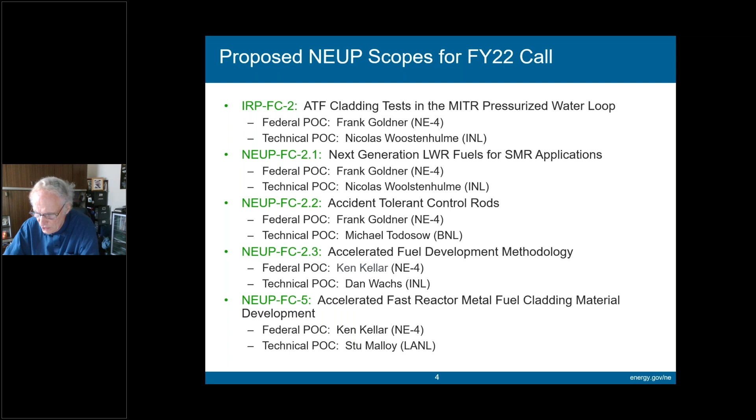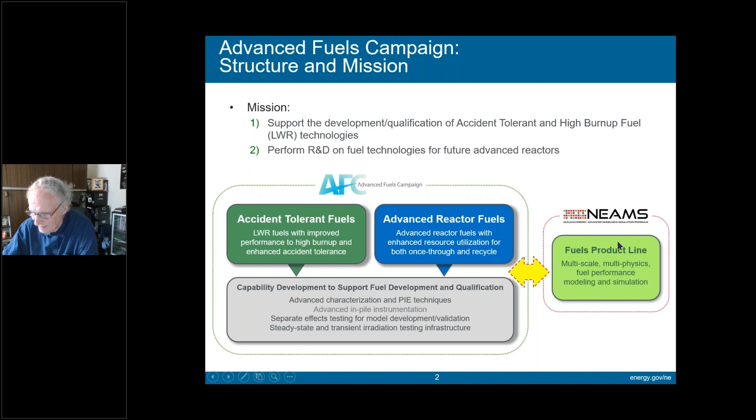Okay, this is what we'll be covering today in order. And we'll have the contacts at the very end of the presentation. I'll have a contact sheet, which will give you the email addresses of everybody that you're hearing today. Whoops, wrong direction. Okay, this is the first one I want to address: ATF cladding tests in the MITR pressurized water loop. This is an IRP, which means,

Excuse me. I was doing so well.

Okay, here we go. So the first IRP, since this is a rather large one, could be large and could be for a significant amount of time. This is one of the only places where we indicate an area that we wish to use. Thanks to the cooperation of MIT, they have a research reactor with a pressurized water loop. And since the ATR is down for a while, and we don't have other advanced facilities with loops available to us, this looked like a very interesting area.

One reason it's important to ATF is that up to now, we get the combined effect of coolant and concept when we put the lead pins in commercial reactors. I think we're in about 8 reactors, which is the good news, but of course we can't play around with adjusting the reactor coolant, and there are some benefits that people have told me about in the past, and that's one reason behind this.

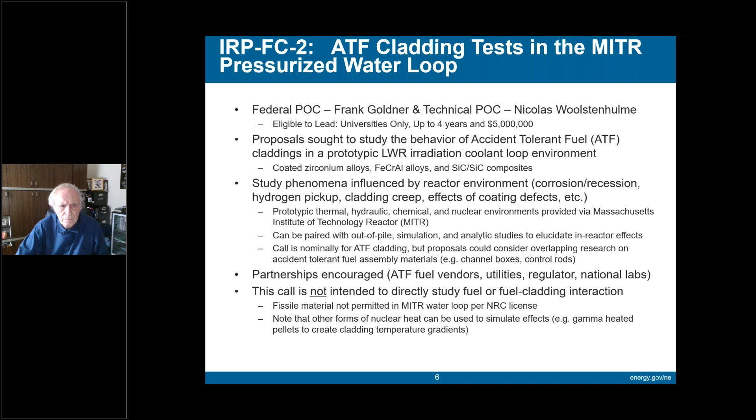And so this is, at least in an isolated loop, a flowing loop like this. So this call is not about fuel. This is not about fuel or the fuel cladding interaction. This is about cladding behavior and cladding coolant behaviors. But I should note that other forms of nuclear heat could be used to simulate certain effects, such as a gamma heating surrogate. Shown here on this screen are just some specs about MIT's water loop.

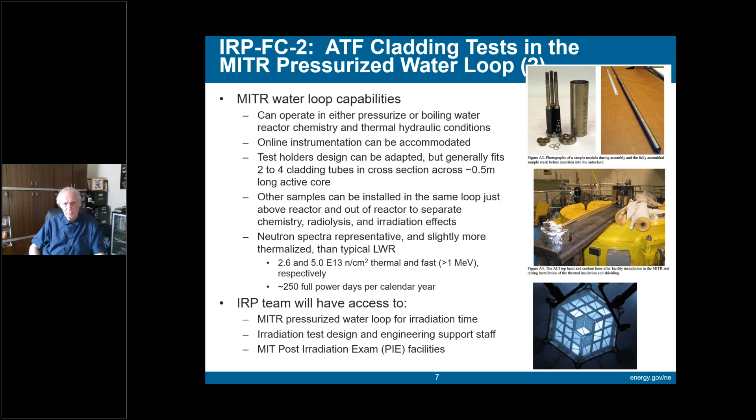I won't go through this in detail, except to say that they have a really nice spectra that's fairly representative of an LWR. The flux is pretty good, and they operate a fair number of days each year. Because it's representative, but not necessarily accelerated, I think what that means is in order for the data objectives to be accomplished within the time frame of this IRP, we really are looking for proposals that create impactful data in the lower fluence or the lower exposure regimes, right? It would just take many years to get to a very high DPA in MIT, and that's probably not going to fit into the proposal time frame.

Other than that, you can put a few specimens in. There's other details there. You can see those as you wish. Frank already talked about this, a really notional example schedule of what we envision such a proposal would look like with designing and fabrication, something on the order of a year to a year and a half of irradiation, followed by some post-irradiation exams, final reporting. So because that's pretty compressed for an entire irradiation campaign, I would say we're focused on data outcomes that can be accomplished with online instrumentation and at lower fluences, and perhaps with limited PIE.

And the last thing I'll mention, Frank already said this, but I'll just reiterate, is that strategically, we've talked with a couple of people at MIT who are experts on using and designing tests for this loop, and they have committed to abstain from writing their own proposals so that they can be available to help consult on your idea for this one. So even though I think I'm listed as the technical point of contact, there's really some co-technical points of contact at MIT. So I would encourage you to reach out to me, and we'll coordinate a discussion to talk about your potential proposal. So that's it.

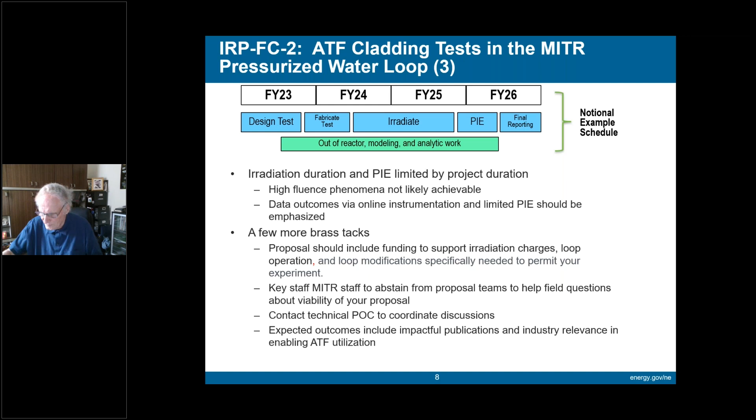I'm excited about this particular project for a lot of reasons. I think it offers some terrific technical opportunities that help the campaign, but I'm also very interested in expanding the exposure of students and faculty to opportunities to conduct irradiation testing in high-end irradiation testing facilities. And so we think that's a critical skill set that needs to expand in the greater community. So I'm looking forward to seeing the teams that put together for this and what kind of great ideas come out of it.

Thank you very much, Dan. As I said, we have a lot of hope for this. There is a problem with the short time, so that has to be considered, obviously. But hopefully, I think instrumentation has made major advances in the last 20, 30 years. So that's also a good opportunity. And of course, this may complement some tests that are being done by some of the vendors under our program, which is why I would also encourage contact with some of the vendors who have claddings that are near term as well as longer term.

Okay, now I'll switch to the next one. Thank you very much. Okay, this one still keeps Nick involved. He's really one of our go-to geniuses, and so I'm very pleased to keep him involved. The idea here is this is kind of more like let's think about the future as well as the present.

There are some LWR concepts being considered for the future. As you know, right now one only knows obviously about 2 or 3, but we were thinking that maybe some of the things we're developing now may have validity to other concepts that are new. The 2 obvious ones are shown here, but they also someday will be quizzed when they go through licensing, or as part of their licensing, on beyond design basis accidents, which of course the small reactors may have much less of a situation to be concerned of and may not even be a licensing issue.

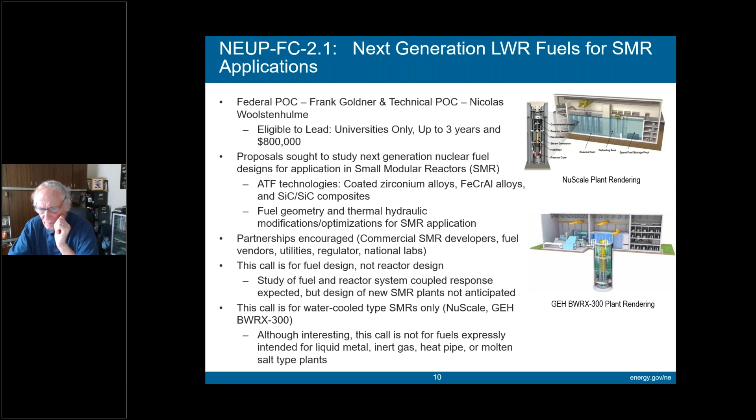And so, you know, we brainstormed upon ATF technologies. Frank pointed out coated zirconium alloy, or perhaps other FeCrAls, silicon carbide composites, maybe even fuel geometry modifications and thermal hydraulic optimizations for SMR applications. So this is a little open-ended. The challenge is think of an innovation to research in the fuel design that somehow increases the value potential of this next generation of SMRs. Let's see, what did we write here?

So one might even think about what I'll call a phase 1, phase 2 strategy, right? I think we all know that once SMRs are starting to get on the grid, which hopefully is going to be in the next few years here, I believe it will. Perhaps there's a fuel design that's optimized for a retrofit application to support a power uprate, for example. Or perhaps there's a fuel design that supports a second generation design iteration and an even more advanced SMR. So use your imagination and come up with something that's credible. And I'm really excited about this one. I think this one will be fun.

It should go without saying, but I'll say it anyway, that obviously a partnership with an SMR designer or a fuel designer would be encouraged on this type of proposal. These are the normal smaller price tag NEUPs, not an IRP like the last one we were talking about. So we're not necessarily imagining an in-reactor irradiation. Although who knows, maybe a few years from now we'll have an IRP for that as well. But for now, we're really imagining things that would be lab work and analytic studies, modeling, design studies, that kind of research. So out-of-pile testing to support those types of things.

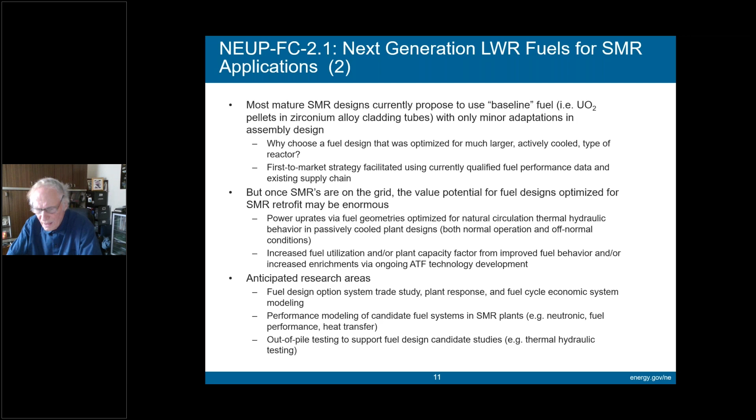I think many of the reactor vendors, you'll notice, describe the lack of innovation in fuel as a feature. I think in the future we need to fill that gap, and so this is kind of the beginning point for that effort. And obviously, the experiences we've developed as a collective university, laboratories, industry, and NRC through the development of ATF are great leverage points to help move this forward. And so we're anxious to see what kind of teams can form and what kind of ideas will come out of it. Back to you, Frank.

Okay, thank you. I'm going to move on to the third. I may have time for questions after this one. As I showed you earlier, last year we only could do 2 because of the money concerns. We decided to focus just on an advanced area for ATF, namely when you get into the very high burn-up and high enrichment regime. But this year, even though we don't have much more money necessarily, oh well, we'll see.

This is an area that we had to drop a couple of years ago on accident-tolerant control rods and other materials that are not included in ATF up to now, but are important. Accident-tolerant control rods are important, in my opinion, from accident tolerance concerns, but they haven't been in the formal program. So this is kind of a foot in the door. Of course, it's going to be important because things have been done. Obviously, the vendors have concerns about this. We've had some small business awards in this area.

So this is one where if you're interested, you'll want to talk quite a bit with Mike Todosow of Brookhaven National Lab, because this is kind of what he had. I'm going to let him explain his thoughts. But I'll say, if you do this, we're strongly encouraging that you find out what has been thought of and done, because, you can imagine, silicon carbide is part of the fuel part of the program, but as you know, there are people interested in using silicon carbide for more than just fuel, and so clearly in control rods, if you want to make them accident tolerant, it's a problem of materials, new ones, the materials that do the control. It's across the board.

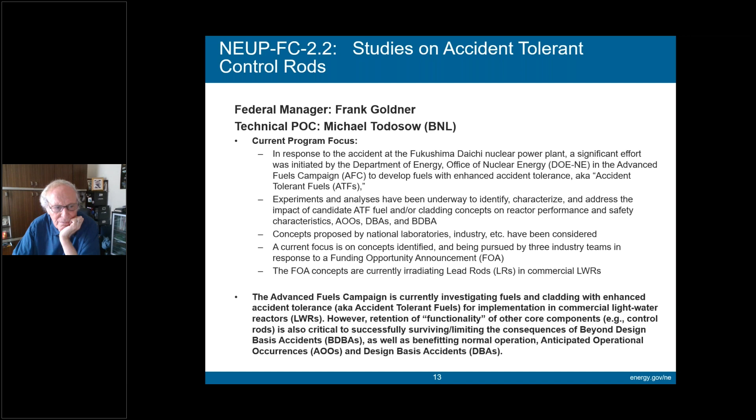It's quite broad. So I'm going to turn it over to Dr. Todosow, who's been knowing about this for years, and here's his chance to get some input. Mike? Thank you, Frank. So I think Frank pretty much covered most of the important points on this already. Again, the focus with the ATF program has been on fuels and cladding, but there's been a recognition that if the fuel holds up, but everything else around it slumps and or melts, you're no longer accident tolerant.

So what this proposal is really trying to get at is, what can you do in terms of materials and or designs for control rods that can increase their accident tolerance while still maintaining everything that you need the control rod to do. So it's not just the control rods, it's control rod guide tubes, it's grid spacers, core support plate that also are subject to lower temperature limits than the fuel is, and it is desirable to see whether some improvements can be made there. Again, one of the key words here is the functionality of both of those systems.

As Frank has said, it's very important that there be a consultation and a recognition of the work that's being done in this area. As he mentioned, there is interest on the parts of NEI and of some of the vendors and EPRI, and in the international community. So it's a broad scoped kind of thing that complements the accident tolerant fuels to make a much more robust system than it is right now.

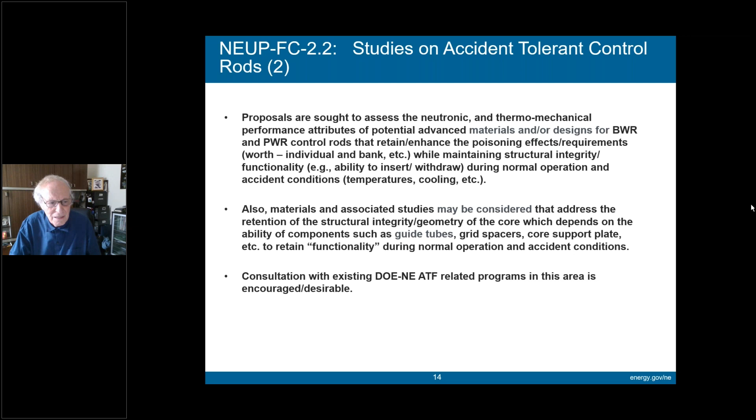Frank and others, I just want to remind everyone that the way that we take care of this NEUP program and the CINR FOA is to make sure that all this information and any conversations are filtered through the NEUP at inl.gov address. That way we can better get that information out to the community and provide the same information to all applicants. So just want to put out that reminder as we're chatting. No, that's very important. Thank you, because I was just looking for near term, but obviously, and the good news is that questions here are heard by everybody, but otherwise, as was explained, questions, even if they're after this, will be documented so that everybody can benefit. We don't want to favor any particular concept.

Okay, anything more before we go on? At this point, Frank, there are no additional questions. So you can move on. Okay, thank you. Let me make sure, let's see, sometimes I have to get my arrow on that. I just realized that. Let's see, accelerated fuel. Okay, this is another NEUP. Okay, that I still can address. I forgot to do it.

Let's see, this is 2.3. Okay, accelerated fuel development methodology. This is, again, a looking forward type thing. And I'm going to turn this over right away now to my colleague, Ken Kellar, who will cover this one and the following one. And thanks. I'll move forward as he tells me to. All right, thanks, Frank. And yeah, we can move on to the next slide.

Okay, so before I get into some of the text on accelerated fuel development, this call is pretty wide open. So you can think physical material things, real world things to accelerate, experimental techniques and such. You can think of new data sources, and you can think of perhaps even using existing data modeling techniques. So just keep in mind this is pretty wide open. So what we're talking about here is trying to take on the challenge of the lengthy qualification process for fuels.

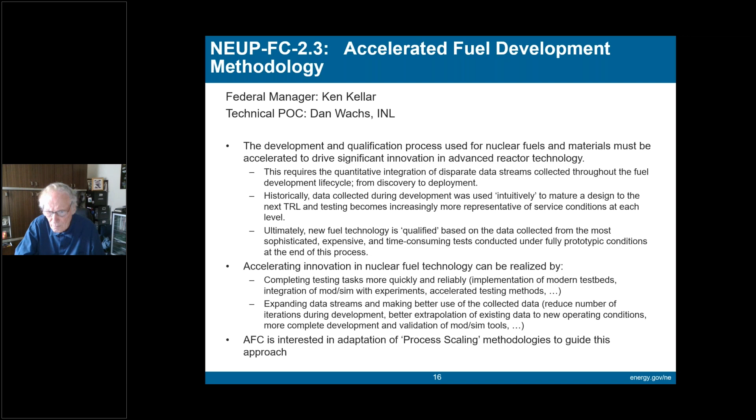And one key thing we're looking for here is we're interested in process scaling methodologies. By process scaling, we're talking about the one process would be the end state, the real reactor, the real thing we're building, the real machine, the real fuel. And then the other process would be perhaps a very unprototypic experiment. The scaling would be taking this unprototypic experiment, looking at how the material behaves in this non-prototypic way and scaling it to the end state where we want to go.

So Frank, you can move on with the slide if you can, please.

And this just kind of shows the process scaling. On the left side are the prototypic questions we have to answer to the regulator and to the owners of the plant. Normal steady state operations, DBAs, design basis accidents, which include reactivity insertions, loss of coolant, or station blackout. And there's also the less extreme anticipated operational occurrences, power ramps, trips, turbine trips and things like that.

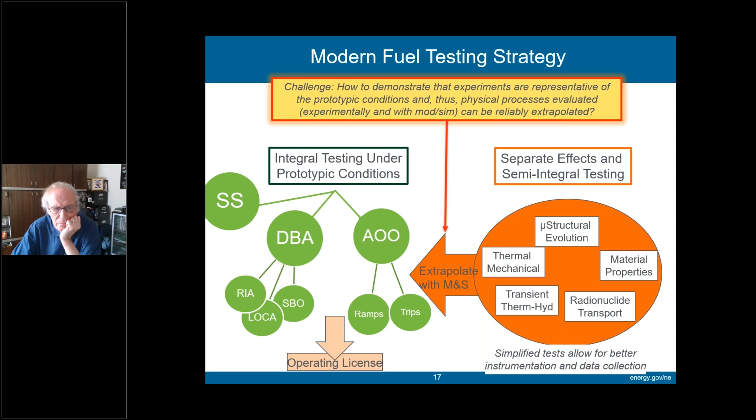So the challenge is on the right side: can we take isolated focused experiments, for example, in microstructural evolution, thermomechanical behavior, maybe a simplified thermal hydraulic situation, look at basic radionuclide transport or other material properties, and can we extrapolate those through modeling and simulation? It'd be great if we could. I mean, the fantasy would be we irradiate something for 5 seconds or 5 minutes, get a snapshot of how things changed, and then predict the future for an 18-month old fuel that goes through an experiment.

So that's about it. I rushed through that. I'd like to give the floor to Dan Wachs. I'm sorry, we do have one more slide here.

But there are problems with scaling. For example, if you're going to use the real metal for cladding on your fuel, you probably can't reduce the grain size, or maybe you'd like to make a cladding very thin to make everything balance out and scale, but you have manufacturing limits where the metal just won't hold up, it's too flimsy, and you can't make something. So those are some of our challenges.

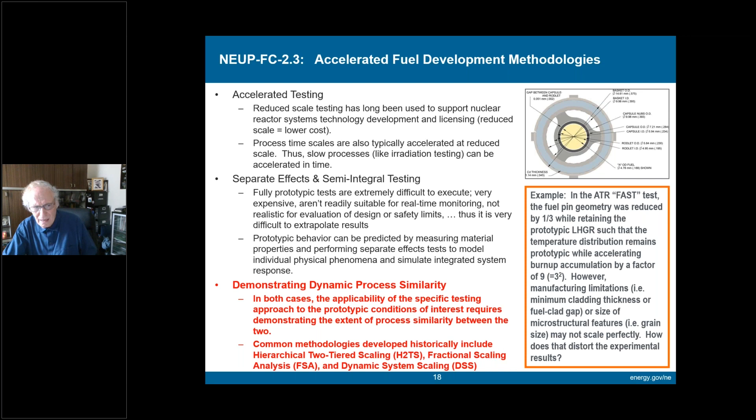I can throw out one: looking at RIA performance of LWR fuel, right? So most of the experimental data used by the community right now was collected at the NSRR reactor that had ultra-short pulses. So when we start looking at adapting that data to more prototypic pulses, what phenomena do we keep and what do we lose? You see examples of these things all over the place for fuels. And I would agree, it could be applied to ATF and it could be applied to advanced reactors.

Great, I just wanted to point that out because I think that's an obvious question. I also thought that had relevance in both areas. And now I guess Ken is still in charge.

Okay, the next call is for accelerated fast reactor metal fuel cladding. So what we're looking at here is opportunities for significant improvement in a metal-based cladding. So I want to be clear that the focus here is the cladding is a metal. Now you might have non-metal constituents or attributes added or incorporated, but we're looking at metals.

And so basically what we'd like to see is proposals that could really give us a jump ahead in where we currently stand with the technologies we're working with. We're looking at a very high dose so we can optimize, so the cladding won't be holding us back for burning up a fuel, so that we actually consume the fuel or have reactivity hold us back rather than just the cladding. High temperatures: we get thermal efficiencies the higher temperature we can operate. So we'd always love to have the higher temperatures if possible.

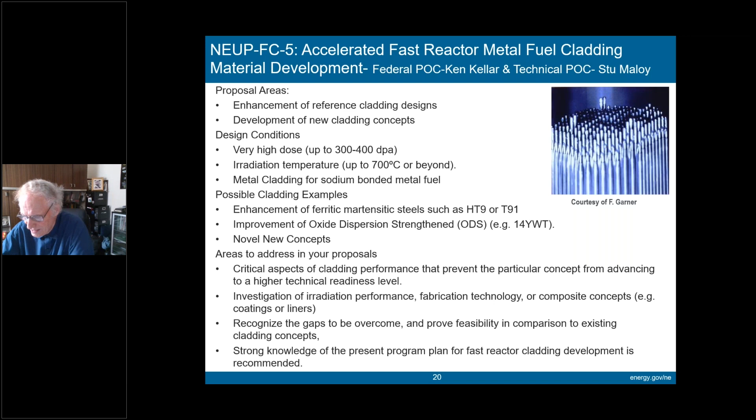And I want to make a pitch for all the other CINR things. When you look at the whole CINR list of everything, I see overlaps between what we present and what you've heard earlier and what you'll hear during these 3 days. There's a lot of interesting relations between different parts of NE, like in the materials area here. There's some interesting stuff in other areas. So if you're interested in this, check all the other ones, even if you hadn't had the time to look at them over these 3 days. I would just recommend that. I found the CINR document rather interesting reading, which is kind of strange. Let's see, the last slide.

I'm on the computer with a group, and I'll call you back later. Bye. Talk to you later.

I think we have enough time for, I would say, easily 15 or more minutes, but I'd like to open it up now on things that you've heard, particularly the last 2, but then later we can also include everything. So I'd like to ask assistance in opening up if there are any other questions by anybody on the call. Hi, Frank. We do have a number of questions for the last 2 that were discussed, and if there's more that come in, we'll address those as well. I'm going to try to pull out the FC-5 questions first and lump those together, and then group the 2.3 questions next.